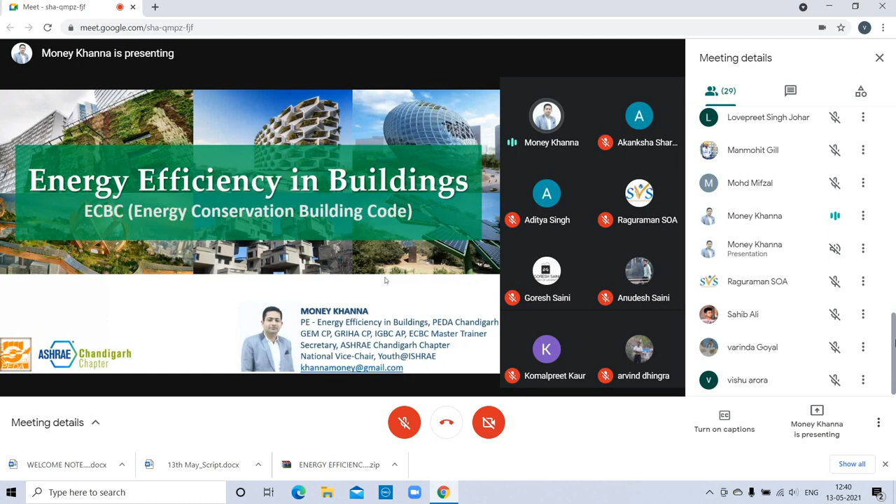So let's start with energy efficiency in buildings, which talks about ECBC, the Energy Conservation Building Code. In a single line, it can be defined as a code specifically for buildings, and the target is to conserve energy in buildings.

This is all about what we are discussing in the next one hour. We all know the situation we are going through, very difficult times where millions of cases have been seen in India, and many cases are increasing day by day in northern India and across India as well. So we need to maintain social distancing, sanitize properly, and stay home as much as we can.

We are discussing buildings today. What is an energy efficient building, and why are energy efficient buildings required? This may be a question each and every student must have. Before directly jumping into the topic, I'll start with some facts we all need to be aware of.

There are some facts about the impacts of global warming. We all know how the seasons are shifting, the weather is shifting, climate change is happening, and global warming is occurring due to the emission of carbon dioxide, CO2 emissions, into the environment.

Another is the melting glaciers. I'm sure you have seen the recent news from Uttarakhand where we have seen the melting glacier, how it has affected human life badly.

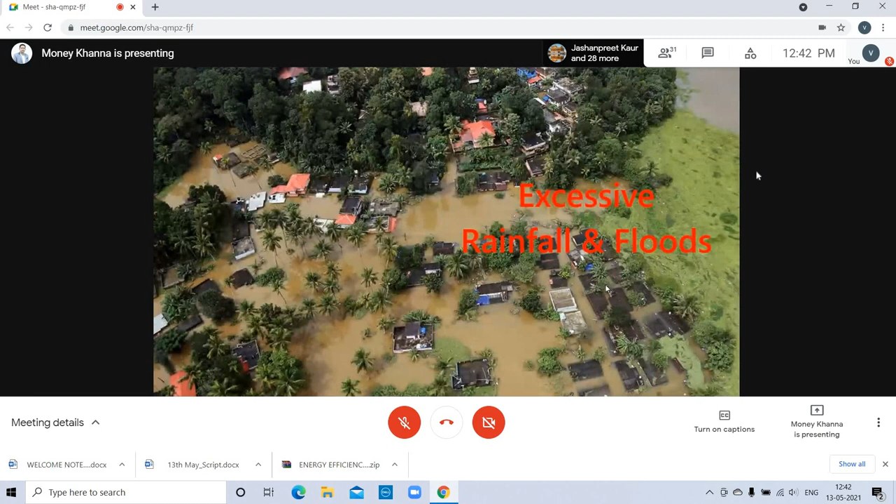These are the environmental consequences: unprecedented snowfall, excessive rainfall and floods. Two years back, there was major excessive rainfall and floods in Kerala and Srinagar. Last year in 2020, it was in Mumbai, Bihar, Madhya Pradesh. So there are many states which have been affected with excessive rainfall and floods.

Another is intense heat waves. The outside temperature and humidity is increasing day by day. If we consider 5 to 10 years back, it was maximum up to 30 to 35 degrees Celsius. But now these summers, we feel that outside temperature is increasing up to 45, 48, even some days 49 degrees Celsius, with more than 90% humidity.

So which is very huge. And what is required for our thermal comfort? It is around 24, 25 degrees Celsius temperature and around 50 to 60% relative humidity. So this is what we require for our thermal comfort.

If the outside air temperature is degrading day by day, air quality is degrading, outside temperature is increasing, relative humidity is increasing, then what happens is our thermal comfort in the external air temperature will not be satisfied, and we shall not be able to stay comfortable in the external conditions.

So even in the developed areas, or we can say the major developing areas, where there are more such resources, more potential to save and generate resources, we still are suffering with acute water shortage—only 7 hours of municipal water supply.

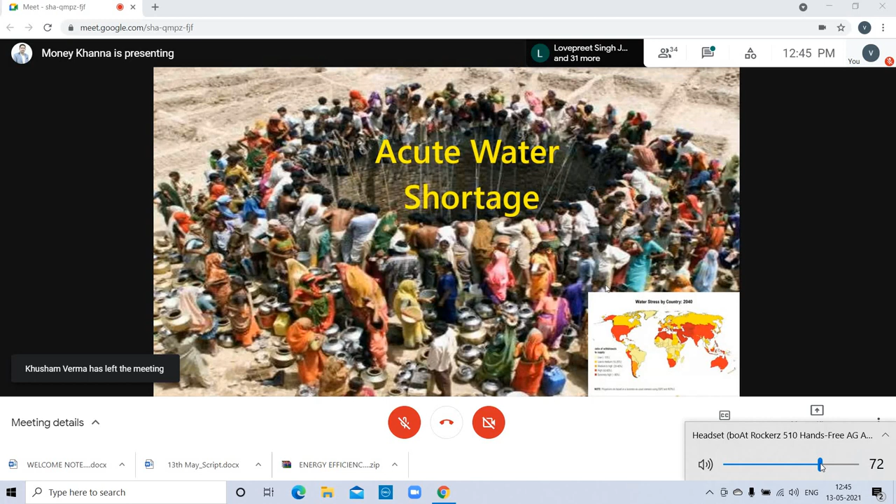Destructive wildfires. What we are doing is destroying our natural jungles and converting them to man-made jungle. Another major issue is the burning of crops.

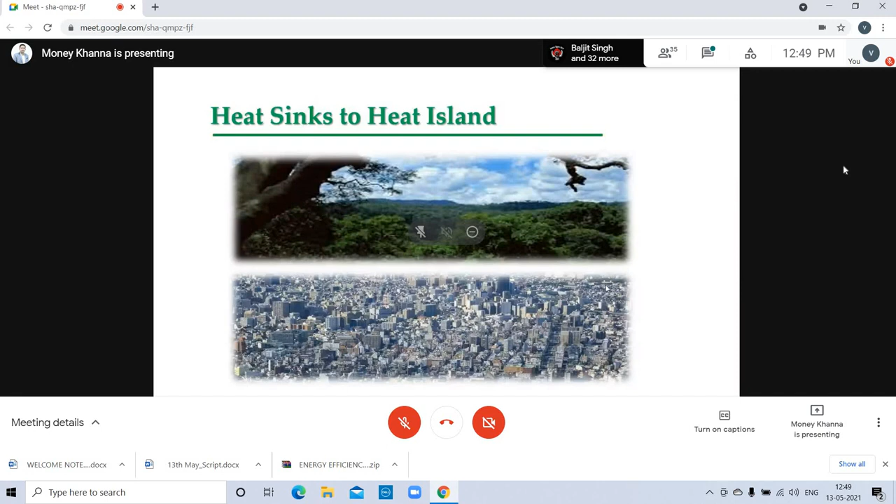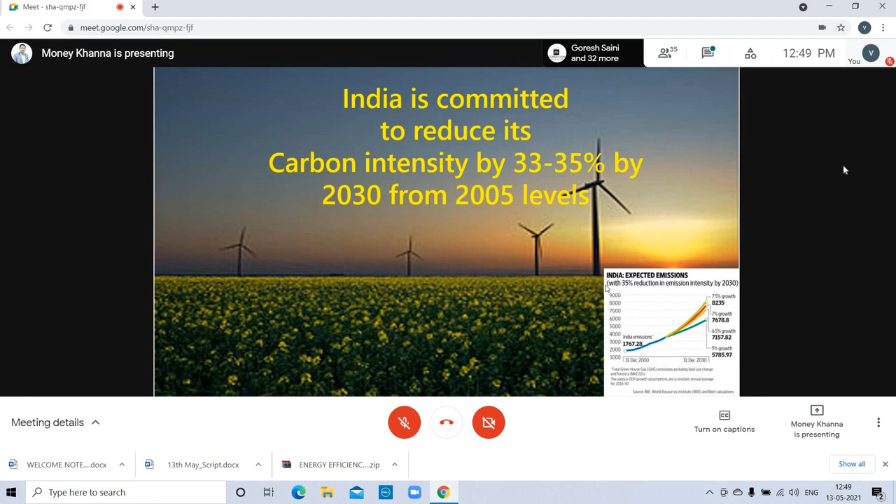So it means we also need to shift towards renewable energy or energy efficiency, which is high time, because we know the buildings are increasing day by day. And under the Paris Agreement and Make in India mission in 2015, we have already signed an agreement where we have committed to reduce our carbon intensity by 35%.

We know the environmental impact of COVID, and we know how the healthcare industry has been affected by coronavirus. But COVID has also given a great opportunity for sustainable development, clearer water and cleaner air. So there is a thought to implement this.

You can see before COVID and after COVID the situation in these pictures. This is of 20th of March and this is of 10th of April 2020, the last year, when the lockdown first happened and complete lockdown started on 22nd of March. There were no buildings, no transport, no industries running. Only a few residential buildings, when people were staying at home. So it means the air quality index was reduced.

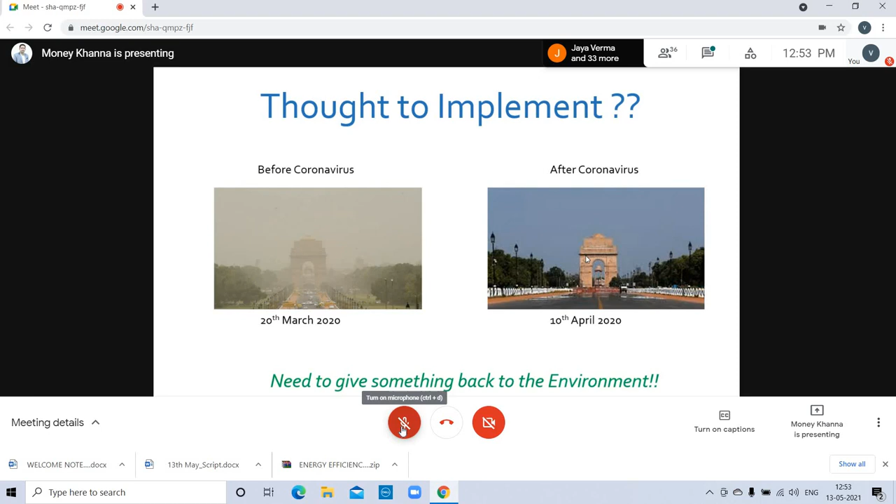The conditions are getting worse because the environmental conditions are already worse there. So we need to give something back to the environment. This is the thought, and at that time, the environment showed a clearer sky, cleaner air, and we were able to breathe fresh, clean air when the air quality index was reduced to 20. The vision is to create a peaceful and sustainable earth which will give us strength for the future.

Now the question is, what is being designed right now, what we are consulting on these days. Being an architect, we need to focus on the design part, how we can integrate the design approach with other engineers like MEP consultants, ECBC, or green consultants involved with electrical, firefighting, and all. We need to create an integrated approach.

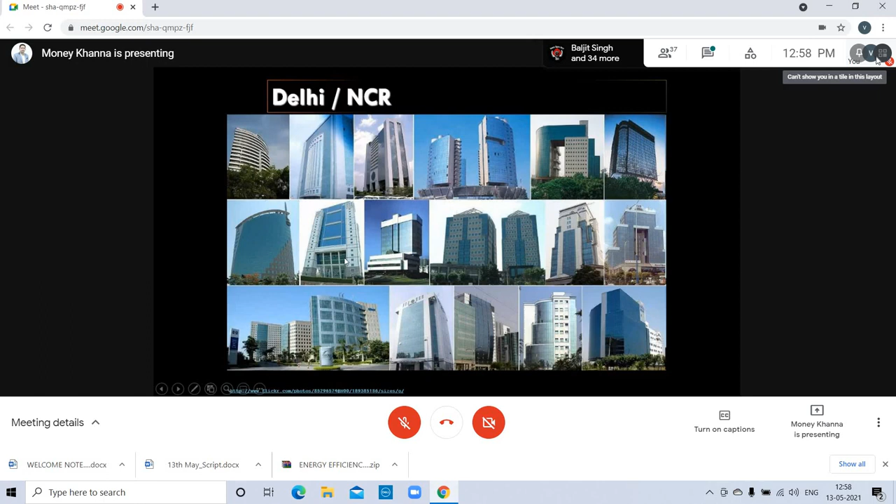The Western architecture that we are copy pasting over here in the composite climate, or even in the Delhi NCR condition, where large commercial buildings are complete glass buildings. Mumbai, a different climatic condition, again tall glass buildings are being constructed everywhere. Kolkata, different climatic condition, again all tall commercial glass buildings we are designing and constructing. So we need to think over it, and you can see the buildings are increasing day by day.

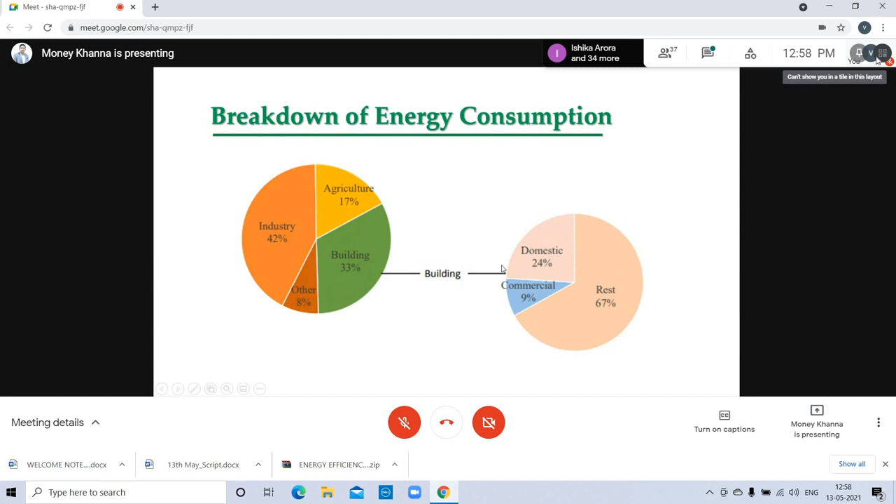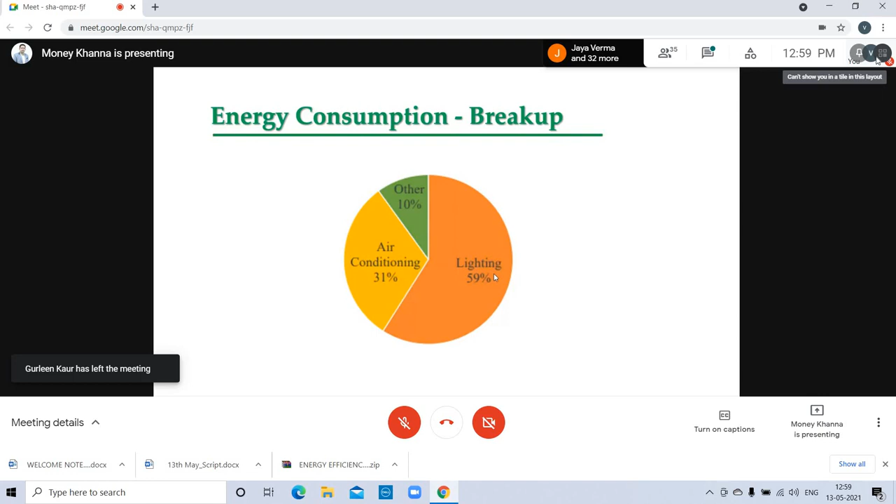Overall, total 33% energy is being consumed in the buildings only. In buildings, more than 90% energy is consumed in air conditioning and lighting, where we need to focus major interest while designing and constructing the building. This is accountability. Once a building is designed and constructed, it will stay as it is for more than 50 years, 70 years, and from the very first day, it will start consuming energy and producing energy bills.

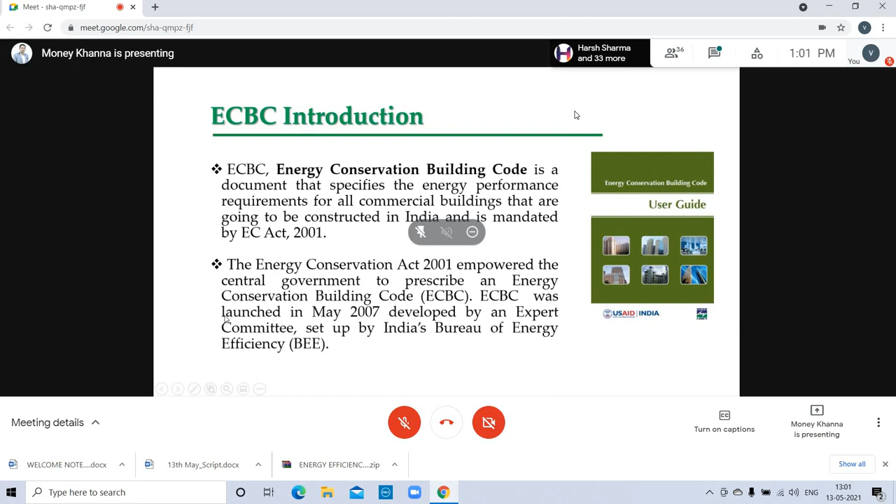As per the EC Act 2001, the ECBC code was developed and launched in May 2007. And each and every government has taken initiative to amend this code as per their climatic conditions, temperature, requirements, and scope.

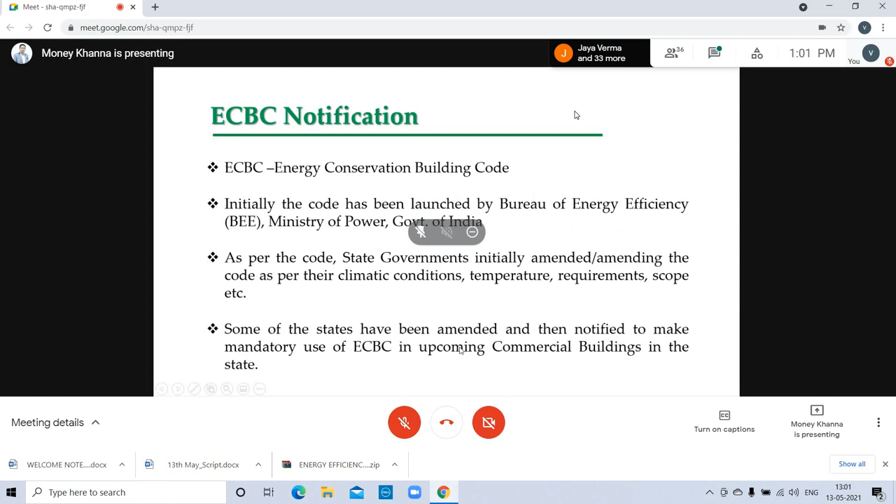So many of the states have already amended this code and notified mandatory use of ECBC in commercial buildings. The objective, I think, was already defined by Aditya for the ECBC. The objective is to provide minimum requirements for energy efficient design and construction of the building. At the level where we are designing and constructing the buildings, we need to raise the bar and we need to set a benchmark, which would be defined as ECBC.

It is not much critical. It is very simple. The buildings were constructed earlier, and now again they will be constructed the same way. The building will be used for the same purpose. Earlier it was for hospitals, again it will be for hospitals. Earlier it was for hotels, again it will be for hotels. The building functioning and the building requirements will be the same for energy efficient design and construction of the buildings.

We need to set a benchmark at the level where we are designing, like the complete glass facades, or the red bricks, or the conventional air conditioner or conventional building systems and appliances, and the glass which we are using, the single clear glass. These are the conventional resources. Instead of the conventional, we can use double glass, which is heat resistive glass. We can use fly ash bricks, AAC blocks, hollow blocks in place of red bricks.

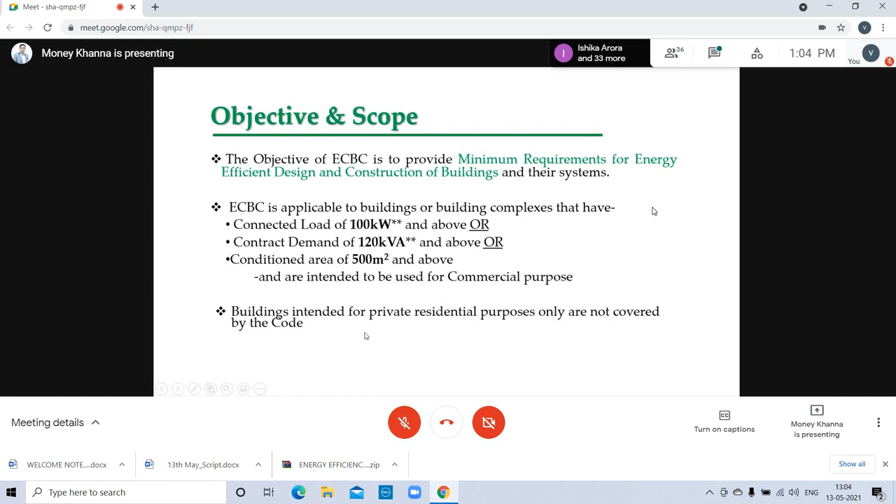To reduce the heat gain, we can put in insulation. So these are the major requirements. We can use 5-star air conditioners and 5-star labeled appliances in the building. So there are many such resources where we can implement energy efficient design and construction. It is applicable for connected load more than 100 kilowatt, contract demand 120 kVA, and conditioned area 500 square meters and above. ECBC is majorly for commercial buildings. Private residential buildings are not covered by the code.

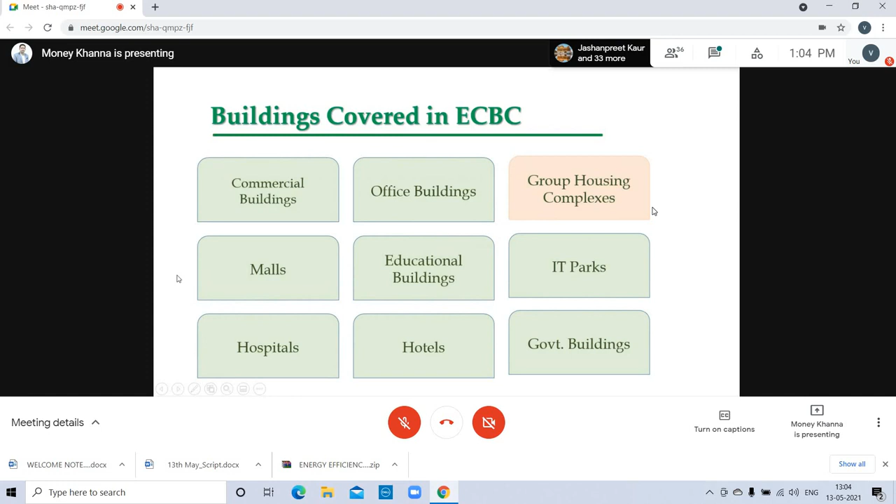Many buildings are covered, like commercial buildings, malls, hotels, hospitals, educational, office, IT parks. These are all covered under commercial buildings and they are a part of ECBC. This is the status of ECBC notification in India. You can see now around 60% of the states in India have already released a notification for mandatory use of ECBC in commercial buildings having connected load more than 100 kilowatt and contract demand more than 120 kVA. More than 60% of India's map is already notified, where Punjab, Haryana, Delhi are already under the mandatory notification.

Some of the states like Madhya Pradesh and nearby states have already prepared the notification and it is under cabinet approval. So it means these are also covered by ECBC. It means around 80% of India's map is covered with the mandatory notification. And when you design any building of more than 500 square meters conditioned area, or commercial buildings in Punjab, Haryana, you need to get certification of ECBC compliance from the ECBC professionals.

When you design a building, when you prepare building plans, and when you go to the authority for approval of your building plans, you need to get your building plans certified by the ECBC design professionals. So you can see here the states, more than 15 states in India where ECBC is now mandatory: Punjab, Haryana, Karnataka, Rajasthan, Kerala, West Bengal, Uttarakhand.

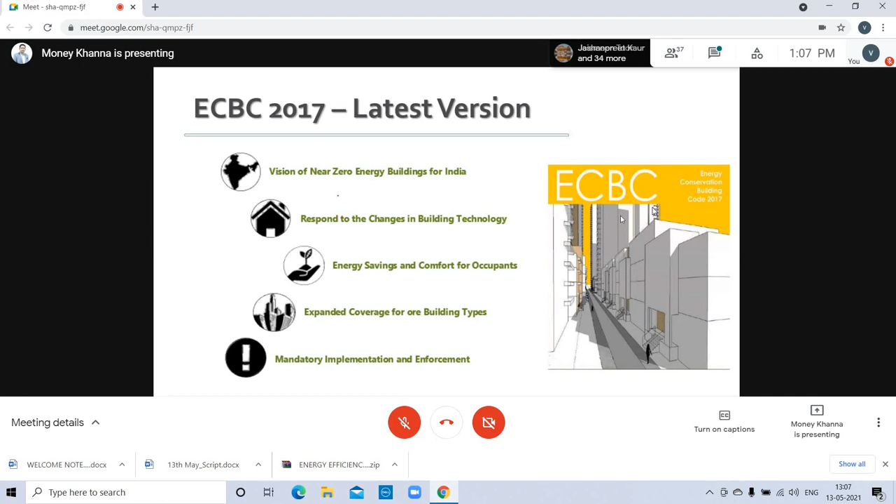It is the latest code and it provides the requirements to be met while designing and constructing your buildings to maintain energy efficiency, to provide comfort, and to maintain the vision of near zero energy buildings in India. It is technology neutral. It calls for the integration of renewable energy. It defines representative building typologies, different buildings, different scenarios, and different requirements to be met.

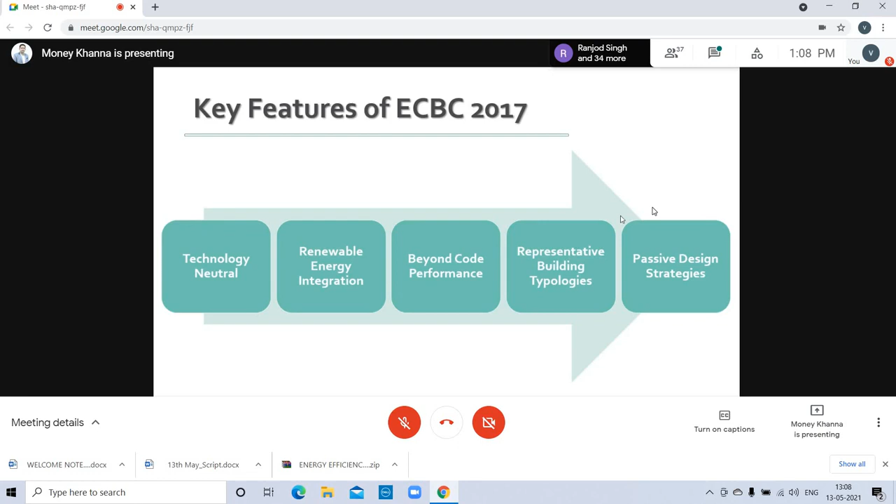Passive design strategies: you need to make a better design which uses natural resources, where we can capture natural light to reduce artificial lighting, natural air to provide proper ventilation and cross ventilation, and the natural sun, where we provide renewable energy sources to generate energy in the building itself, and integration of those technologies which are energy efficient in nature.

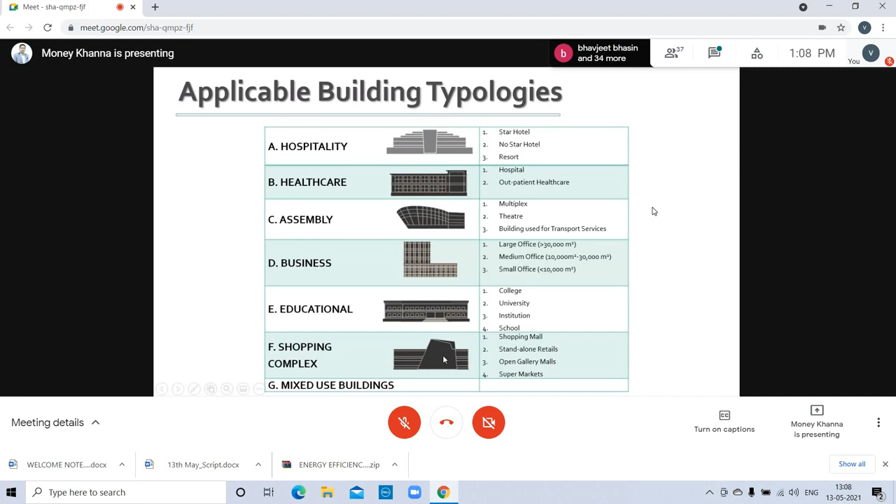This is all about ECBC 2017. You can see the building typologies: hospitality, healthcare, assembly, business, educational. These are the various types of buildings which are covered and being a part of ECBC 2017.

I must encourage and emphasize that we need to design and construct climate responsive buildings, irrespective of whether it is at Jaipur, Mumbai, Chandigarh or Amritsar. If the same building is copy pasted in each and every place with different climatic conditions, your purpose of maintaining energy efficiency will not be solved.

So, Punjab, Haryana, Delhi are covered under composite climate. Jammu, Kashmir, Himachal are covered under cold climate. Rajasthan and Madhya Pradesh are covered under hot and dry. Bangalore and Hyderabad are covered under temperate. And warm and humid covers Mumbai, Gujarat, and Kerala, some of the coastal areas.

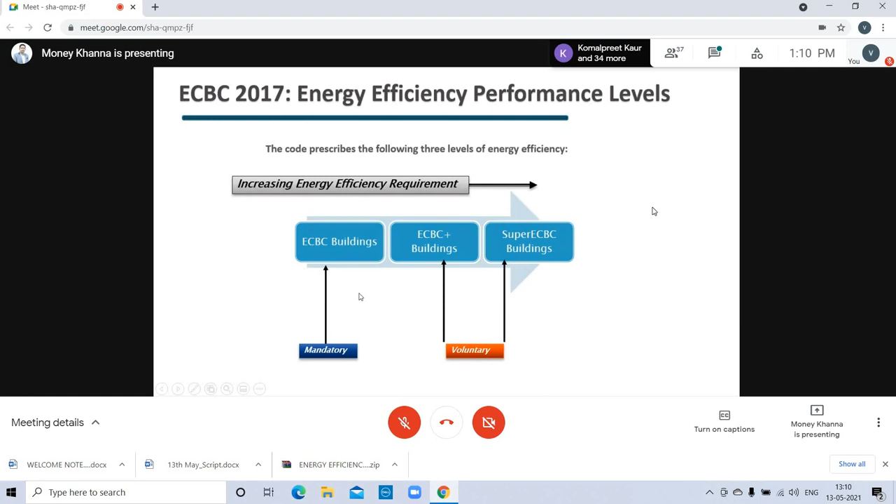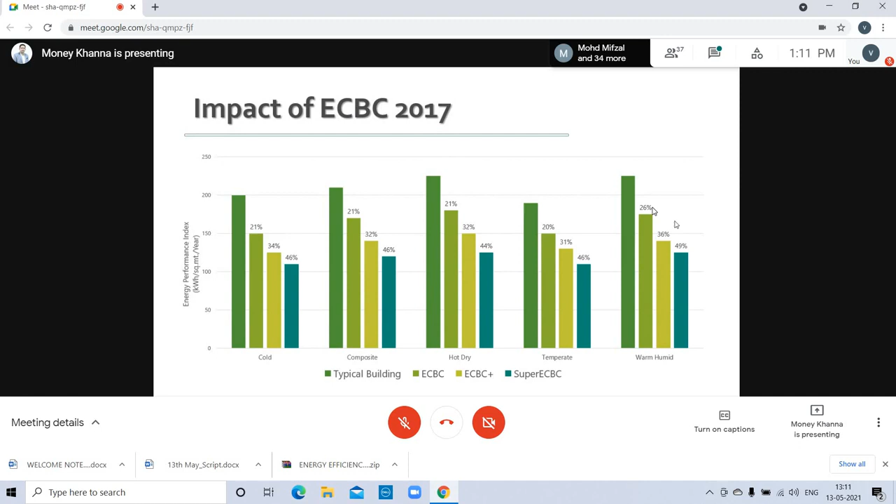ECBC 2017 has 3 levels you need to maintain and achieve: ECBC buildings, ECBC Plus and Super ECBC. ECBC Plus and Super ECBC are voluntary in nature and the ECBC level is mandatory. ECBC buildings can save 20 to 25% energy. ECBC Plus can save 30 to 35%. And Super ECBC buildings can save 45 to 50% energy while designing and constructing ECBC compliant buildings.

So what we need to achieve, what result do we need to carry out? What is the last outcome? The last outcome is the EPI. EPI is the Energy Performance Index. The Energy Performance Index is the annual energy consumption in kWh, in units, divided by total built up area in square meters, excluding parking.

Annual energy consumption over total built up area in square meters will be the EPI, and the EPI of the building should be close to 0. If the EPI is 0, then we can say this building is a net zero energy building. Or if the EPI is close to 0, we can say it is a near zero energy building. So this is our total objective and outcome from the energy efficiency point of view.

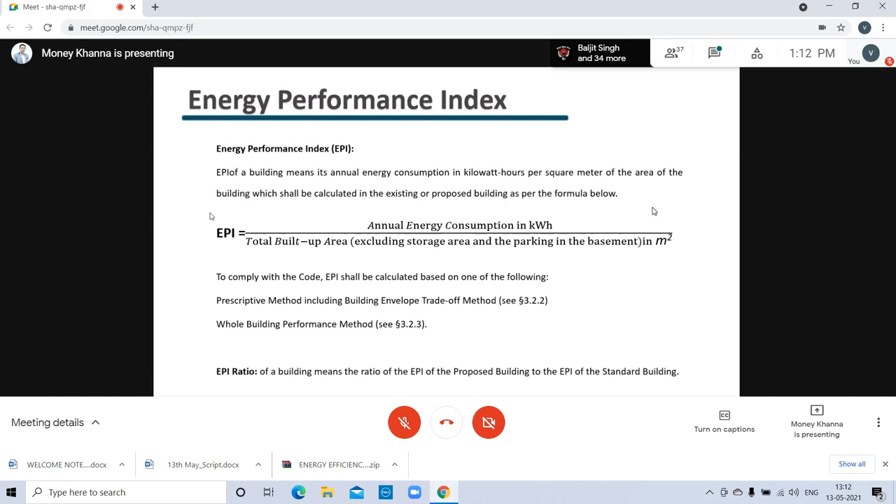Your EPI of the building should be close to 0 or equal to 0. If it is equal to 0, then we can say it is a net zero energy building. If it is near to 0, then we can say this is a near zero energy building. So the question is what you need to do.

There is another parameter which is ECBC-R. ECBC for residential buildings is also coming up. The first part of this code is already notified, but it is voluntary in nature as of now. For large residential buildings, we know we are growing not horizontally these days, we are growing vertically. Previously we were discussing 500 square yard plots, 1000 square yard plots, but today we are discussing 2 BHK, 3 BHK, 4 BHK

residential areas. So that code, which is Eco Niwas Samhita, ECBC-R, is launched by the Bureau of Energy Efficiency. It is being implemented by many of the states, where Punjab is one of the leading states where ECBC-R is being implemented.

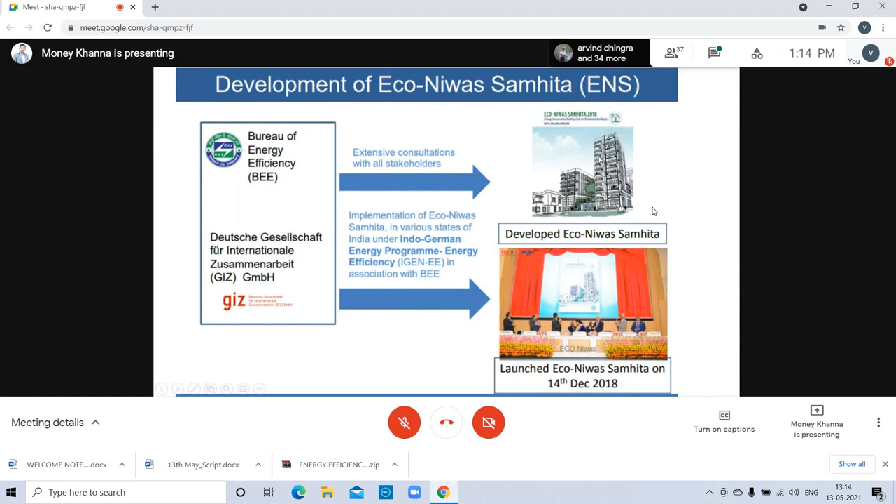Eco-Niwas Samhita was developed by the Bureau of Energy Efficiency in association with GIZ, an energy advisory body from Germany, with the help of extensive stakeholders. Eco-Niwas Samhita was developed in 2016 and was launched on 14th December 2018 by Independent State Minister, Mr.

R.K. Singh. Electricity consumption in the residential sector in India is increasing, because if we design and construct 10 residential buildings, we may get the chance to design one commercial building.

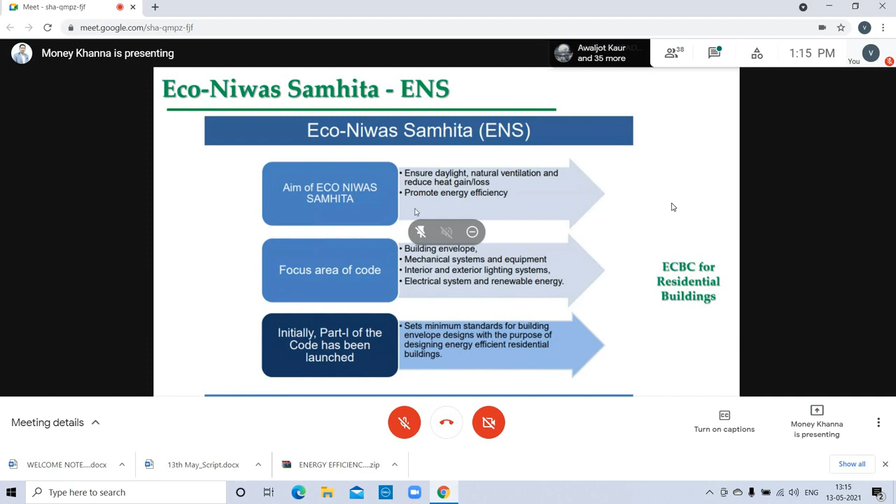So one commercial building is equivalent to around 10 residential buildings. We know around 33% of the energy is consumed in the building sector, and out of that, 75% of the total in buildings is consumed in the residential sector only. So you can think about how energy efficiency plays a major role in commercial and residential buildings to ensure proper natural daylight, natural ventilation, and to reduce solar heat gain in the buildings. To promote energy efficiency, we can develop and design ECBC for residential buildings.

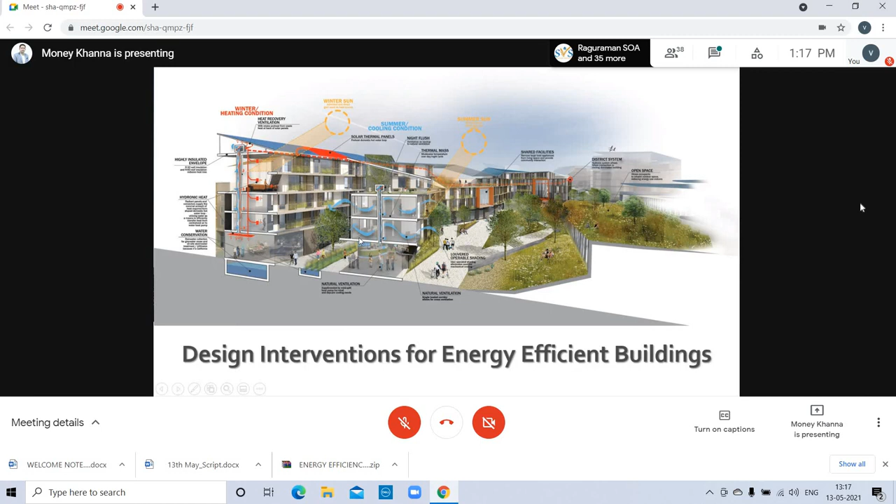Thermal mass, the wall and roof assembly, the sections, the night flush system, the solar thermal panels, solar PV systems, the winter sun, the summer sun, how it is affecting the building, highly insulated envelope, whether roof or wall, and heat recovery ventilation. You can see natural ventilation, how it is being provided, the cross ventilation, the openable windows. Once the air enters, it will cross outside. Again, there is the center space, the green area, and cross ventilation is provided for cross ventilation and natural ventilation.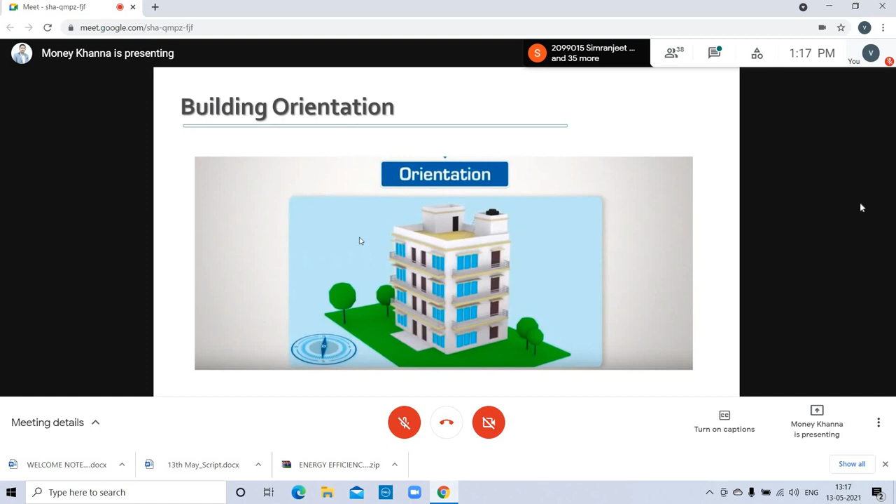Your question: basic parameters to follow, how to start designing energy efficient buildings and green buildings. First, you need to set the orientation. Your building orientation should be such that it does not face the major south or west direction, because in Punjab or Haryana, this is a region with maximum solar penetration in the south and west direction. In the south and west direction, we need to reduce the exposed area. The maximum orientation should be north facing. The maximum facade should face the north-south direction.

The window size and type: we need to provide only 40% window wall ratio. You can see here, whatever window is provided, there is a complete overhang in front of the windows. So window size should not be more than 40% window wall ratio, and it should be single glazed or double glazed glass. The U value: we need to provide proper glass which allows natural daylight to enter inside the building. The wall should be insulated.

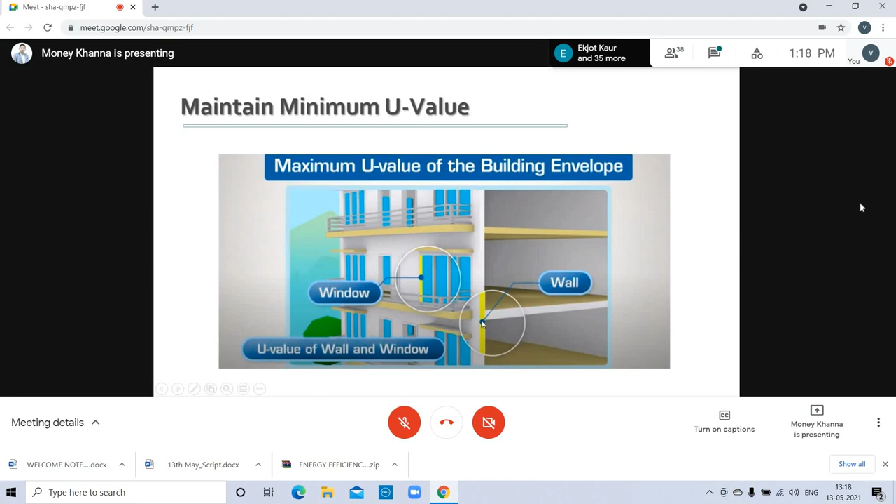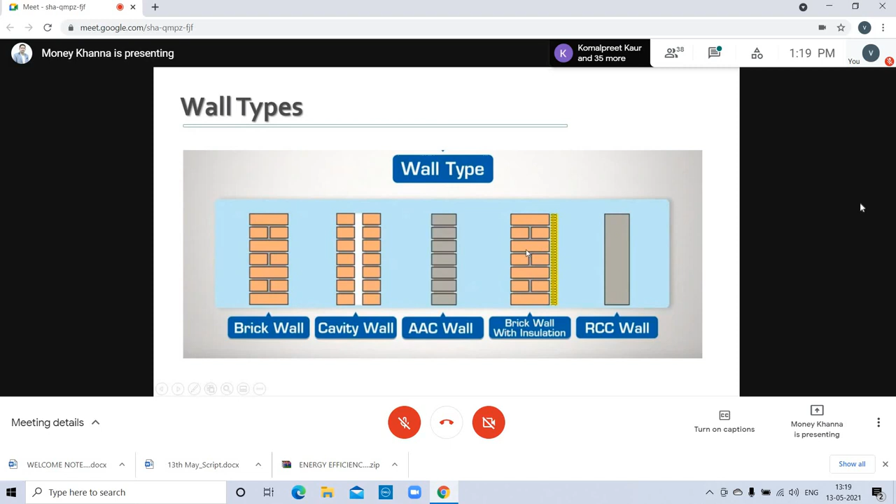The glass should be UPVC frame, double glazed glass, and the wall should be like the brick wall, the cavity wall, the AAC wall, the brick wall with insulation, and the RCC wall. We can use such types of systems, and these systems should be energy efficient, and the whole assembly should be designed so that we can reduce the outside heat gain travelling inside the building. So we can provide cavity wall with insulation, air cavity wall, brick wall with insulation, AAC wall; these are various types.

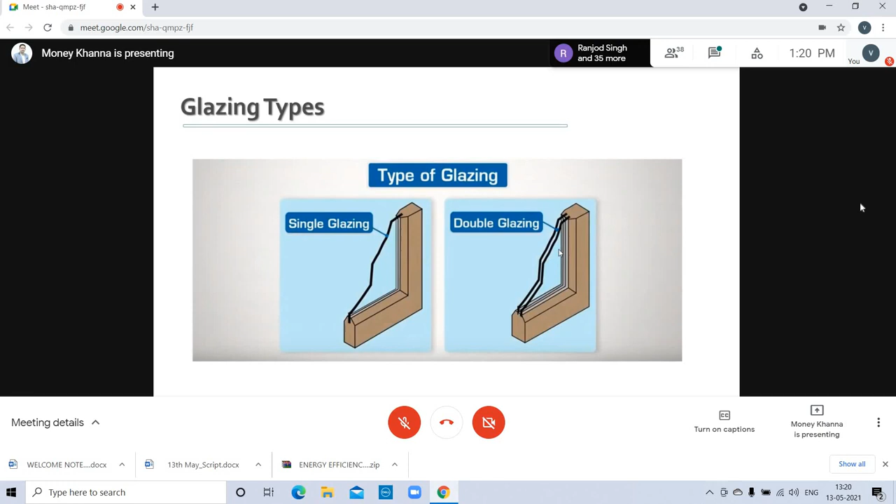And the glass, this is a glass example. This is a UPVC frame with double glass and single glass. Single glass is around 6 mm and double glass would be around 18 mm, where 6 mm is front, 6 mm at back, and 6 mm is the argon gas filled between the two glasses, which acts as an insulator, restricting the maximum heat gain from outside the building.

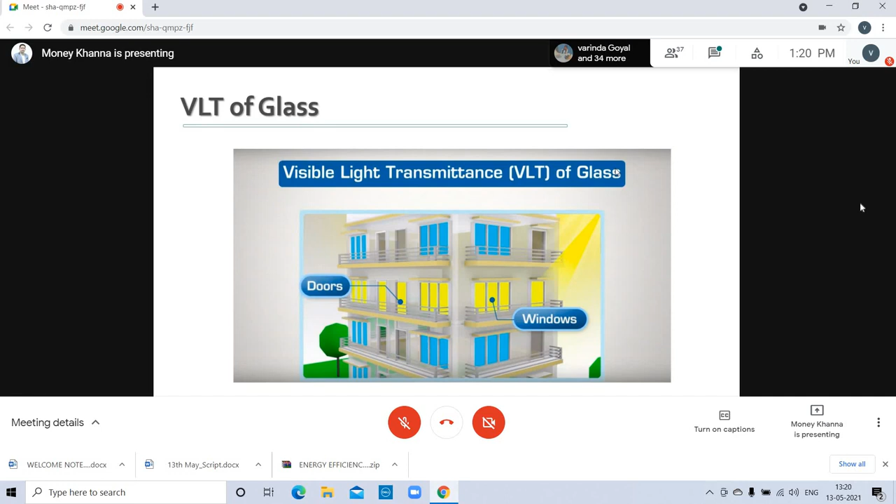The VLT, visible light transmittance: we should use glass which captures the natural daylight from outside. We should not put black glass or dark blue glass. Instead, we can use light blue, light green, clear, tinted or shaded glass, so that with the VLT we can capture maximum natural daylight from outside to inside our building. To improve daylight, whatever glass portion we provide should have overhangs, so that we capture only natural daylight without the solar heat gain.

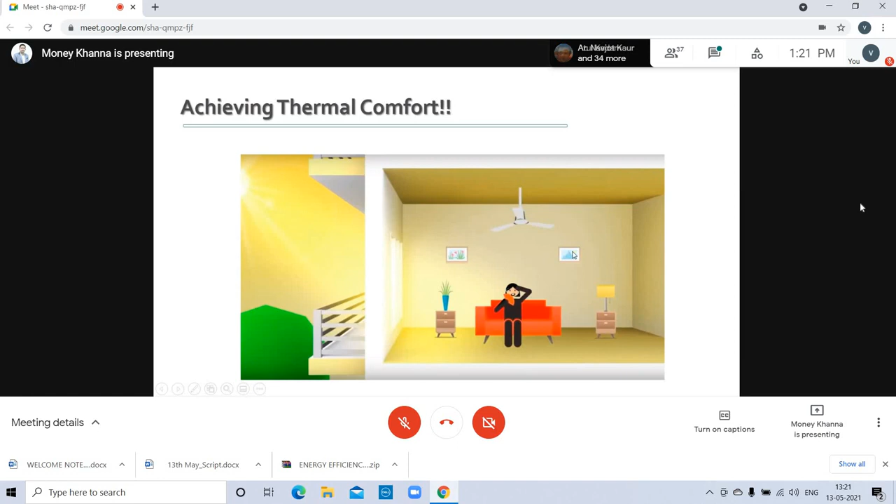Achieving thermal comfort: this is the area inside the room. It provides the cooling, and whatever windows are open will be provided with cross ventilation, and we can achieve the thermal comfort requirements even without any air conditioner. This is the improved natural ventilation. This is the cross ventilation provision. From one side air will enter, and on the other side the air will leave.

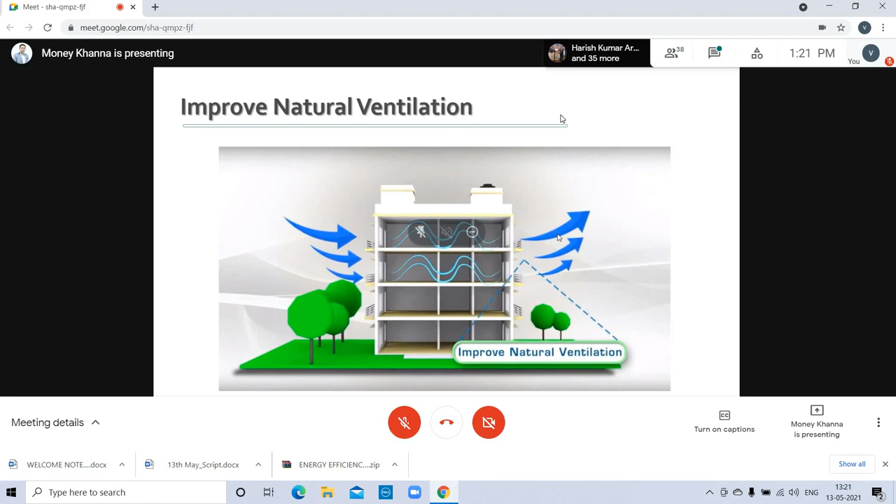So the air changes will happen, the relative humidity will be reduced, and the air temperature will also reduce, because the air changes will happen, and improved natural ventilation can reduce the requirement of air conditioners in the building.

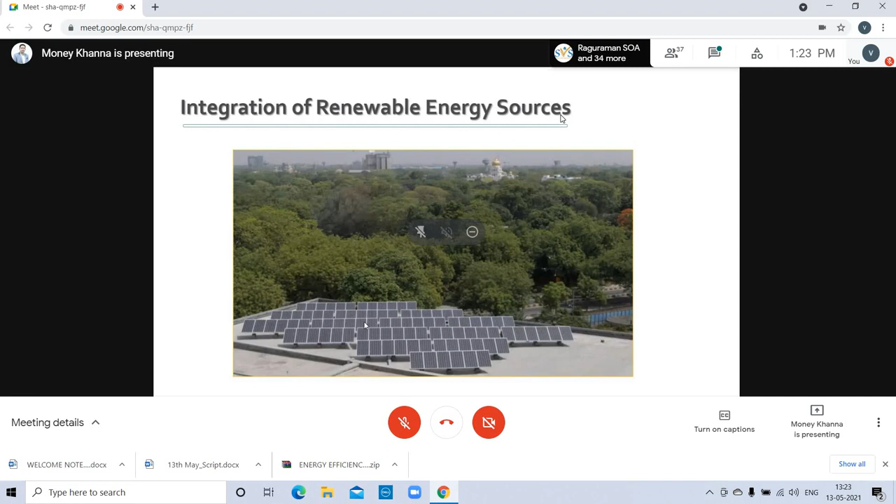Integration of renewable energy system, because this is a very integral part to create near zero environmental conditions, to create net zero buildings. We need to have renewable energy sources in place, so that we can also generate some energy in the building itself. We should not require outside energy from the grids or from any other external resources. We need to provide renewable energy sources in the building itself.

Now the question is, we will design whatever you say. Whatever you say, we will design the orientation. Whatever you say, we will design the window wall ratio. Whatever you say, we will design the vent and improve the natural ventilation. But what are the materials we need to incorporate in the building? This is the last part, and further we'll discuss the case studies.

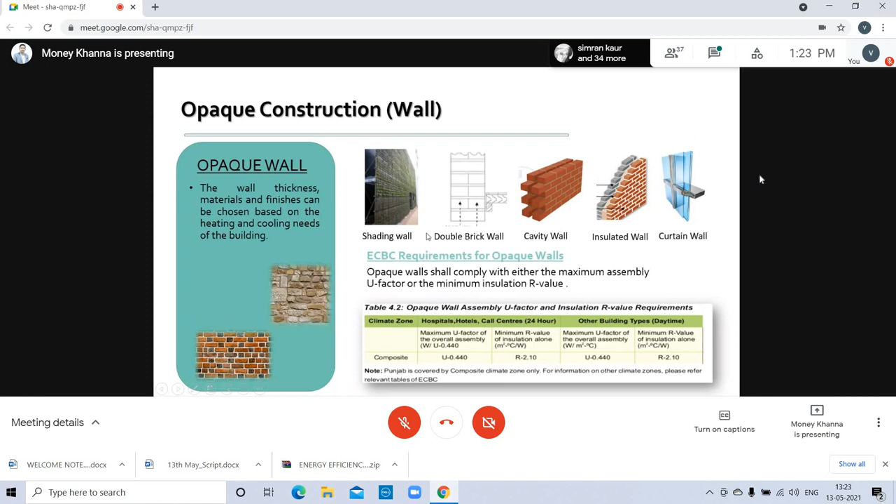Recommended building materials for the walls: the shading wall, the double brick wall, the cavity wall, the insulated wall, and the curtain wall. These are several parameters. Whatever we design, it is like this. Single brick wall, only 9-inch thick brick wall we are using. This is the U value, 1.78. U value means thermal transmittance.

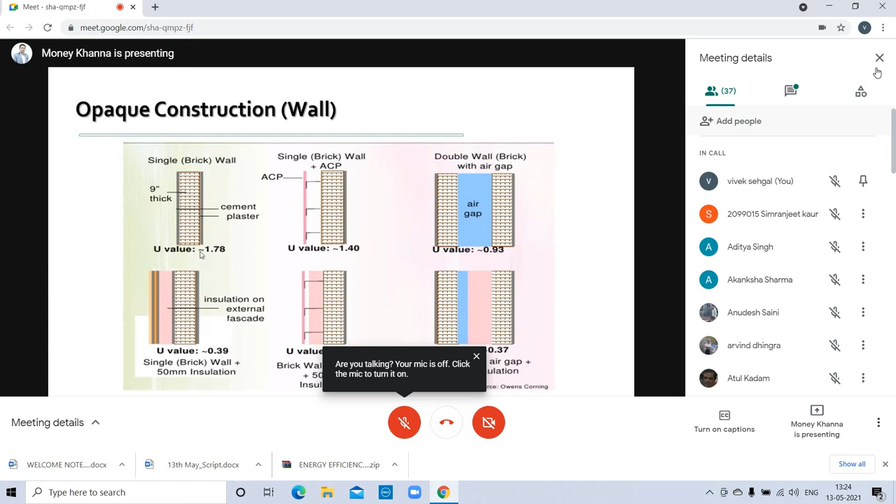At what percentage outside heat will enter inside the building. It means U value is 1.8. It means 1.8 times the outside heat is entering inside the building through processes like conduction, convection, and radiation. These are three modes of heat transfer: conduction, convection, and radiation. Conduction is through walls, convection is through doors and windows, and radiation is through direct sun radiation. It is entering through the glass area.

So we are constructing buildings which are worst in nature. 1.8 times the heat is entering our building. What does the ECBC say? ECBC says your U value should not be more than 0.4. 0.4 U value should be met. So what we have done is, in addition to this brick wall, we have used fly ash bricks, and in addition to fly ash brick, we have used insulation, so that it can restrict the outside heat gain, so that a U value of 0.39 would be achieved.

This is a 3-layer structure. One is the single brick wall, second is the brick wall with ACP, aluminium composite panel, and third is the double brick wall. And these are examples of what we can do to achieve 0.4: replace the red brick wall with fly ash or hollow brick or AAC block. In addition to it, we can place insulation, around 2-inch, 50 mm air insulation. This is how we can achieve the wall assembly.

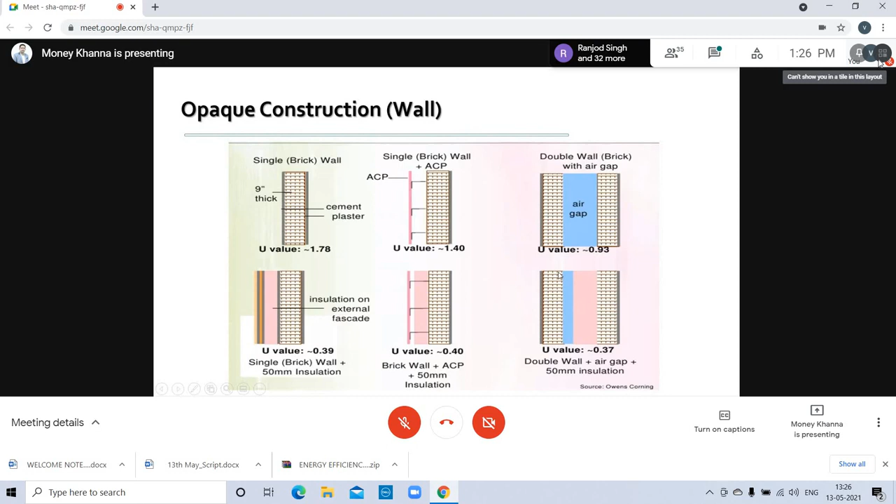Sir, what are AAC blocks? AAC blocks are lightweight autoclaved aerated concrete blocks. Autoclaved aerated concrete block, it is lightweight in nature. It is a composite brick. It is hollow in nature, and you can see one AAC block is equal to 8 red bricks. So the R value, basically the resistivity value, of red brick is 0.8. 0.8 means 80% of the heat from outside to inside can travel.

In AAC block, it is around 0.32. 0.32 means only 32% of the solar heat gain can travel inside the building. The rest we will restrict, so we can save more than 40% solar heat gain inside the building with the help of these AAC blocks.

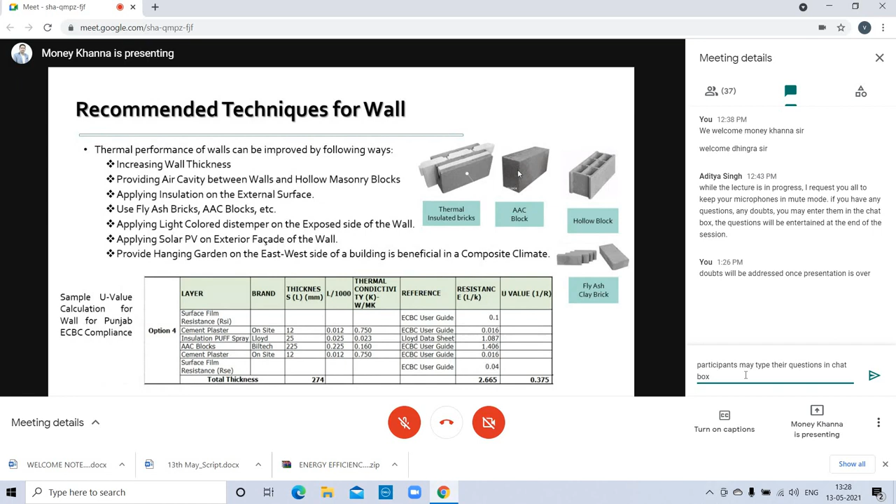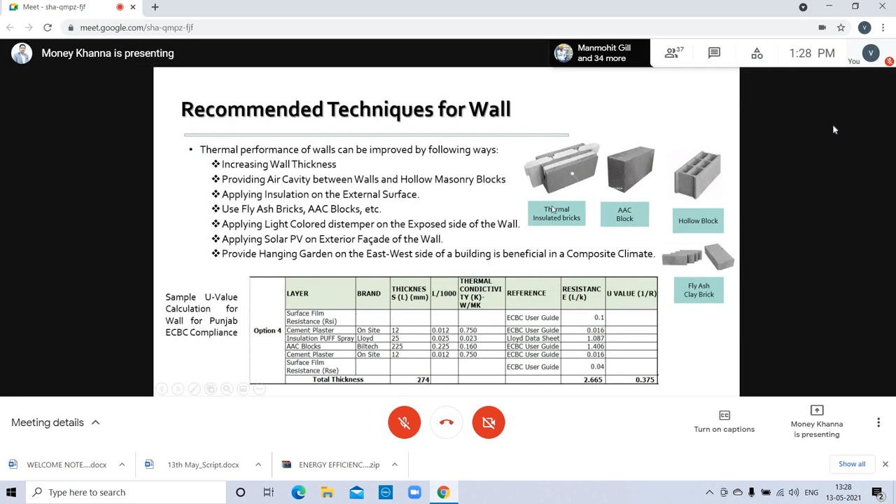Similar in nature, hollow blocks are there, where the air cavity plays a major role inside the block. The fly ash brick has a resistivity R value of 0.6, and hollow blocks have an R value of 0.45. So you can move forward from red brick to fly ash brick, and for further improvement you can use hollow blocks. For more improvement, you can use the AAC block, and for even more improvement, use thermal insulated blocks, where insulation is a part of the brick itself. So these are the wall assemblies.

Wall assemblies include the cavity wall, thermocol insulation, glass wool, rock wool, and puff insulation panels. These are the various building materials you can use.

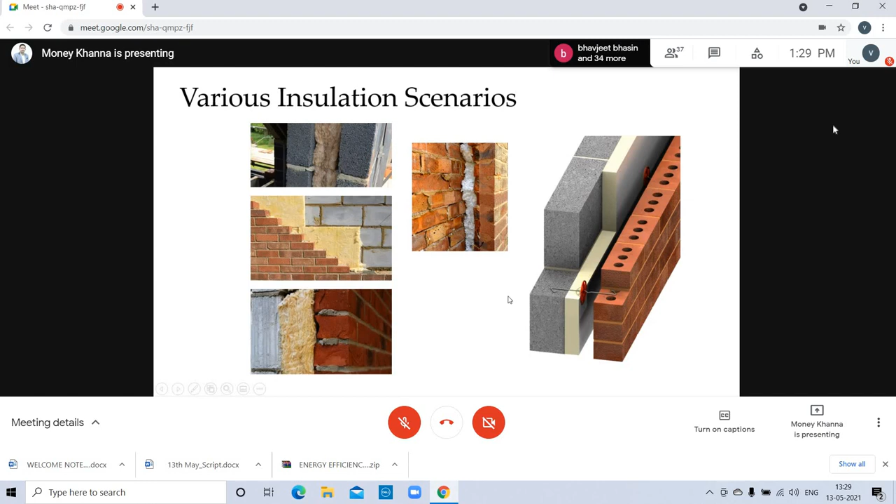So whatever the assembly, whatever the cavity wall with insulation, whatever the thickness of that material, the less solar heat gain there is. Whatever the thickness and material, less resistance means maximum solar heat gain will enter inside the building. So we need to choose the best possible assemblies to go for. We know we need to go for cavity wall with insulation or AAC blocks with insulation.

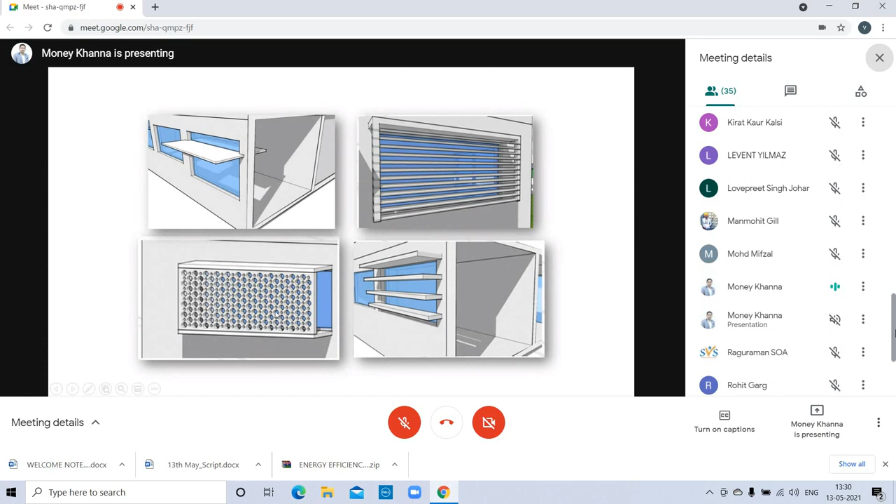These are some of the shading portions, like horizontal shading, jali based structures, and stepped shading, which can allow natural light to enter inside the building while reducing solar heat gain trapped inside. These are the major benefits of putting overhangs, jali based structures, and stepped horizontal shading. These are the areas which we can use to protect against solar heat gain.

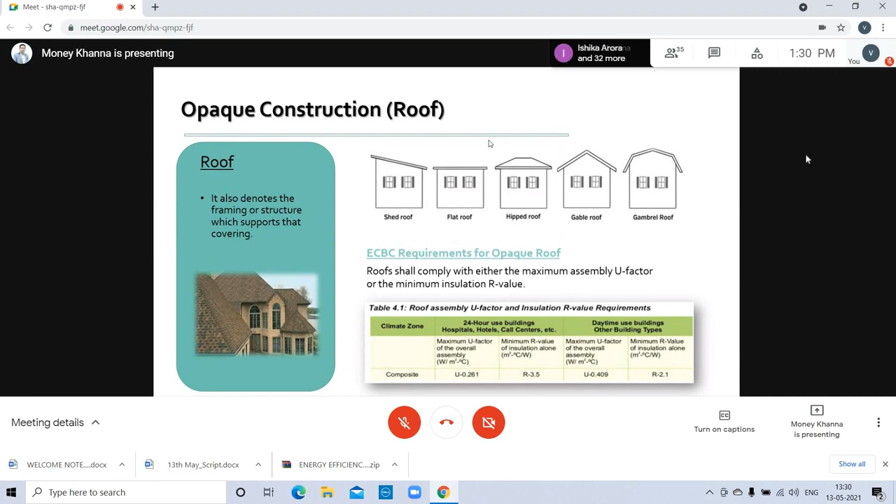For the roof part, we can use the flat roof. More than 80 to 90% of applications use flat roofs in composite areas and composite buildings. We are using brickbat coba in conventional practices over the RCC structure. In addition, we can use insulation over the deck and below the deck. Over-deck insulation is above the RCC level, and under-deck is below the RCC level inside the false ceiling. Over the exposed roof, you can use white tile or white paint.

In addition, you can use the green roof, which is majorly used in terrace gardens, hotel buildings, or restaurants. There are many applications we can also use in residential buildings for organic farming, which can produce food and reduce the solar heat gain entering the buildings.

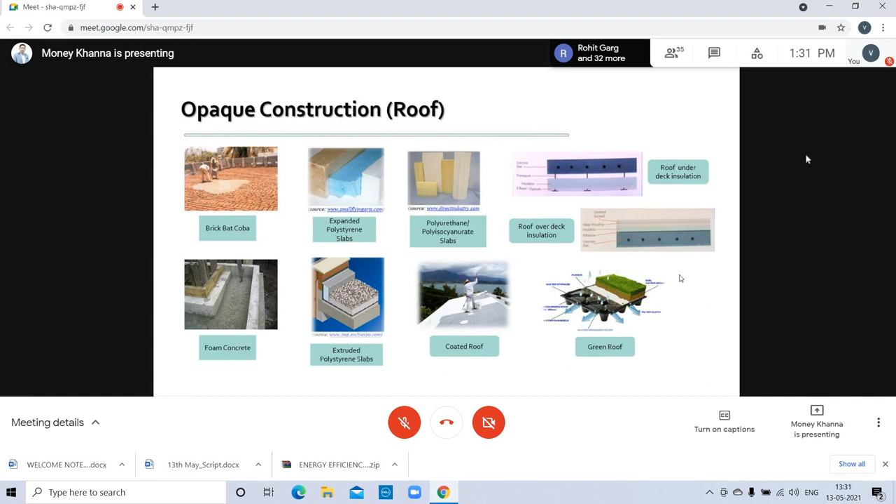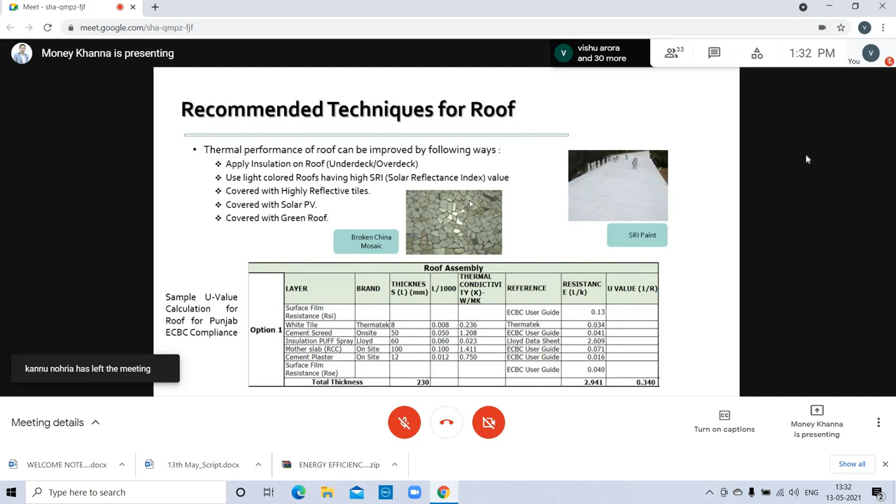Another option is white tile and white paint - it looks like this. In addition, we can also use broken china mosaic tiles. SRI tile, which stands for solar reflectance index, is highly resistant in nature and can reflect more than 95% of solar radiation. Broken china mosaic tiles can reflect more than 40% of solar radiation back to the atmosphere. So these are the cool roof coating technologies.

This is a paint, white paint. It will be applied over white tiles or the surface we have used, the red tiles or red brick tiles used for the exposed roof structure, and over the top of it we can apply white tile or white paint which can reflect more than 95% of solar radiation. The SRI value should not be less than 0.96.

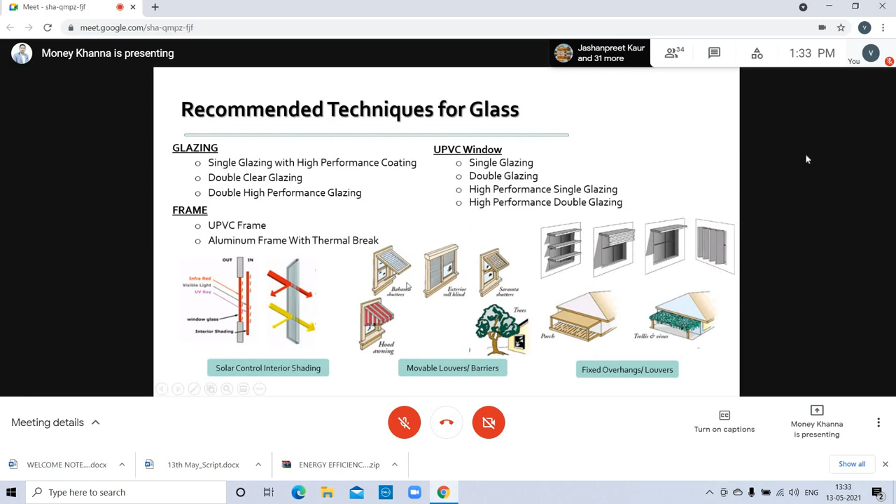Again, the glass - single glaze or double glaze glass or high performance glazing - UPVC windows can use high performance single or double glass. We can use aluminium frames or UPVC frames where double glass is a part of it. In addition, we can provide shading, horizontal or vertical in nature, and use movable louvers or barriers whenever required.

This is another building - we also had a question from people in many other sessions: why are we putting so much glass? Because we need to make the building work that way, so that is why we are using the glass irrespective of the shading.

You can see this building with the help of an artistic look, providing proper shading devices with overhangs and recessed windows. We have used an artistic look that can serve the purpose of reducing solar heat gain, and a building designed like this can help achieve ECBC compliance.

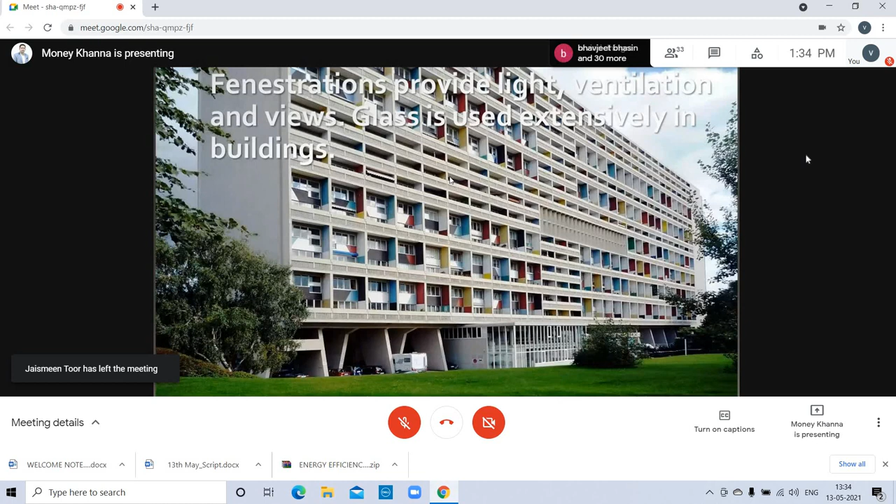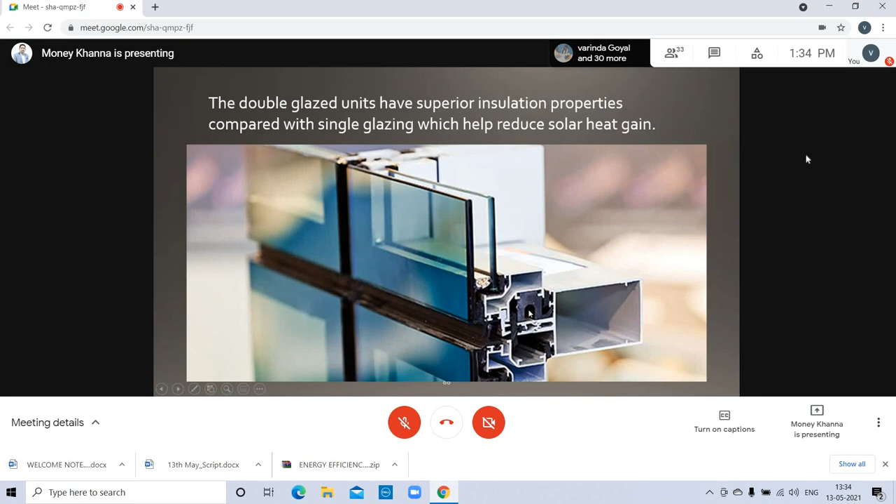In addition to external shading, we can design mutual shading through the building design itself. With these parameters, even for the building envelope alone, we can save 18 to 20% energy through AAC walls, proper orientation, brick walls with insulation, high albedo (highly reflective, high SRI white tile or white paint), roof gardens, roof insulation, and low-U glass using proper glazing with UPVC frames and double glass.

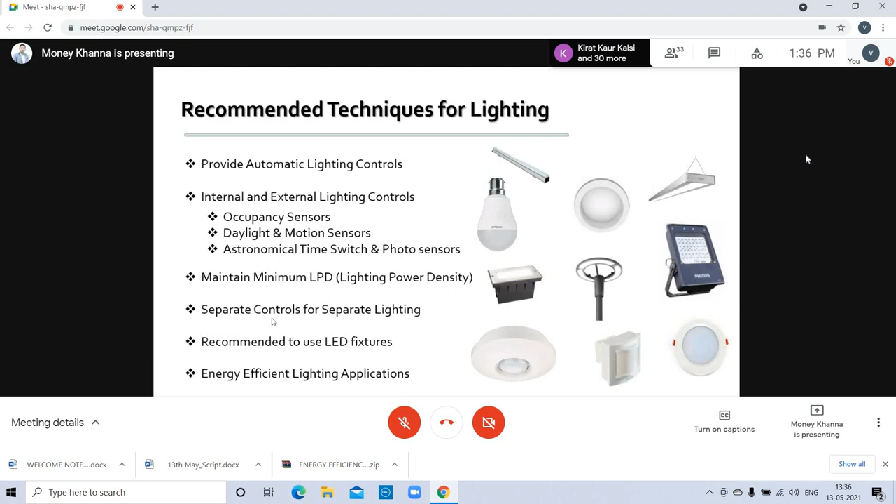For lighting, we can use LED lighting along with sensors such as occupancy, motion, and astronomical sensors. We need to maintain the LPD, lighting power density: for a 100 square foot room, the lighting should not exceed 100 watts, meaning 1 watt per square foot is required to maintain energy efficiency in lighting.

If we use a complete double glass, complete glass building, the outside solar heat gain will directly enter and get trapped inside the building. We can design and construct the building differently instead.

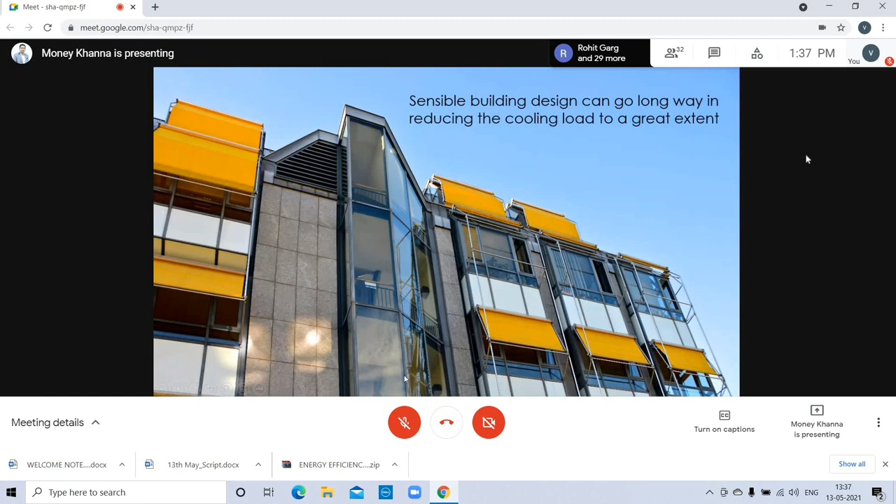Exposed glass should only be used in front of non-occupied areas, like staircases, kitchens, washrooms, and storerooms, which are not regularly occupied.

We should provide shading devices in front of regularly occupied spaces, like the professor's room, director's room, HOD's room, or principal's room in an educational building, along with additional shading in front of that shading. This way, whatever the building design, solar heat gain impact is reduced, less air conditioning is required, and a lower electricity bill is paid. This is a sensible building design that can go a long way in reducing cooling load.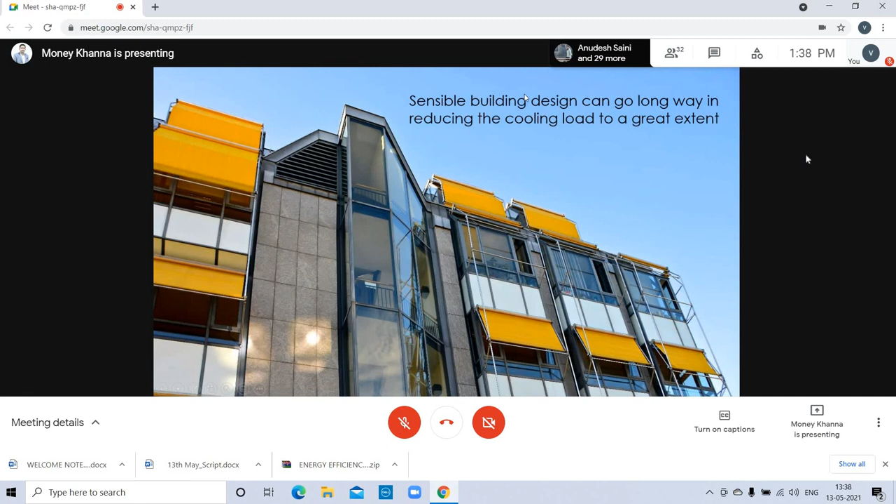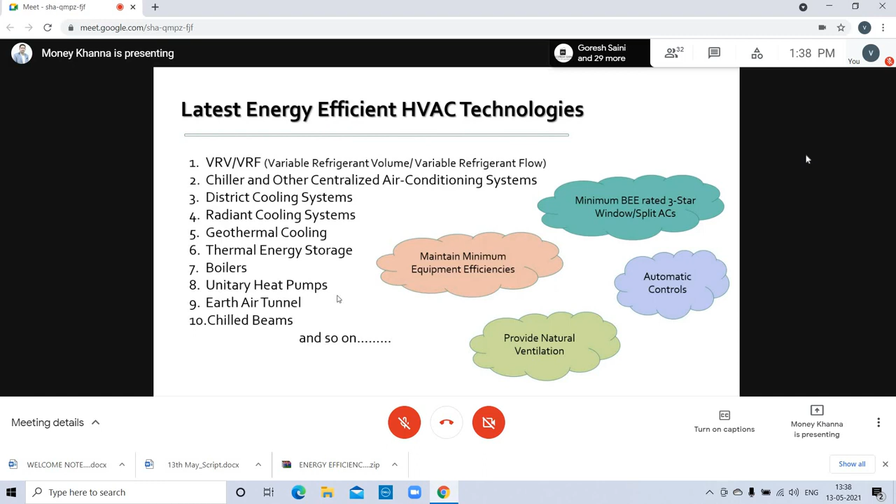There are many HVAC technologies as well: star rated appliances, automatic controls, natural ventilation, and minimum equipment efficiencies like VRV, VRF, chillers, district cooling, radiant cooling, geothermal, boilers, earth air tunnels. Many such efficient systems need to be used for energy efficient buildings.

Now for HVAC, we can use chillers: air cooled chiller, water cooled chiller, centrifugal chiller, used for large commercial buildings like hospitals, malls, and hotels of more than 2 lakh square feet. For such buildings, we need to provide centralized air conditioning systems where we can automate and maintain each and every point.

Whether we use single or double unit air conditioners, or need to set the temperature at 24 degrees Celsius for some rooms and 27 degrees Celsius for others, we can directly automate each and every system from one centralized air conditioning system so that energy efficiency is maintained.

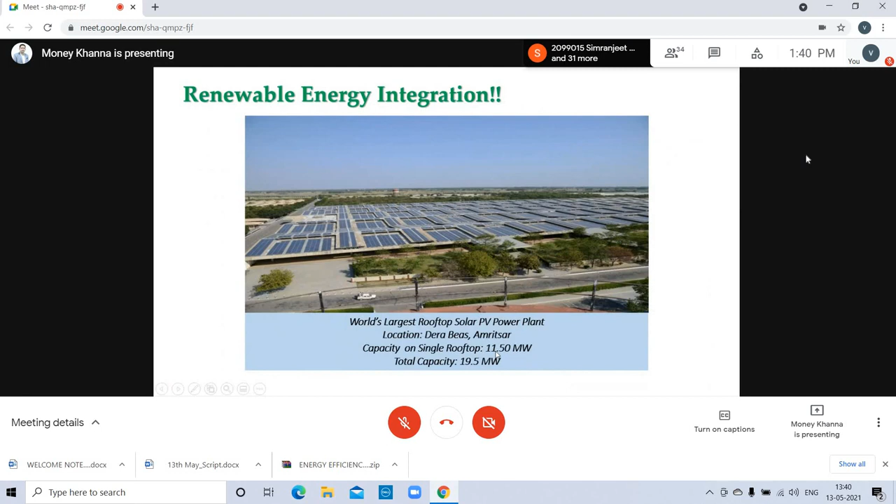This is how renewable energy integration works: the world's largest rooftop plant is at Dera Beas, Amritsar, 11.5 megawatt on a single rooftop. Parliament House has 80 kilowatts, and there's a 2.5 megawatt plant at Sidhwan Canal branch, Ludhiana.

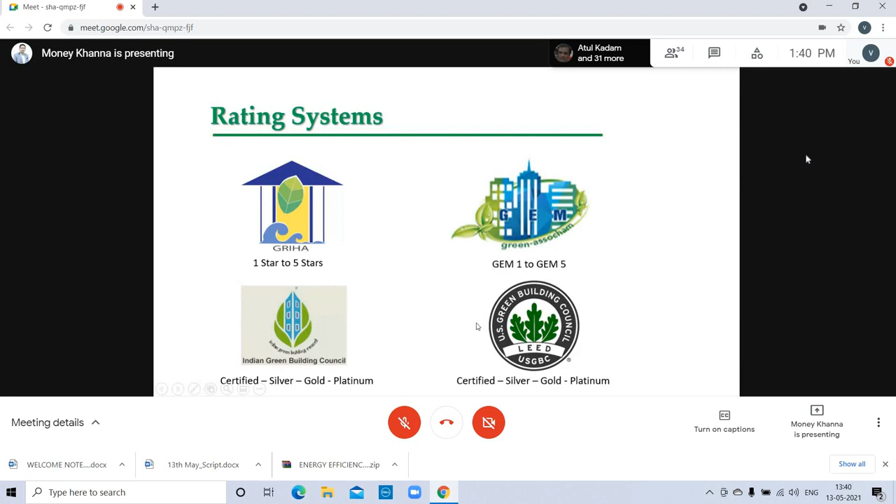For green building rating systems, there are 4 rating systems in India: GRIHA, IGBC, GEM, and LEED. GEM provides GEM 1 to GEM 5 ratings, GRIHA provides 1 star to 5 star ratings, and LEED and IGBC provide certified, silver, gold, and platinum ratings.

These 4 rating levels are used by state governments to provide incentives for construction of green buildings. You can even get 5% extra FAR, floor area ratio, for designing and constructing energy efficient, eco-friendly green buildings that are water efficient, waste efficient, materials efficient, indoor air quality efficient, and innovative in their design and construction.

Some of the case studies I would like to show very fast, as we are running short of time.

BISA is one of the buildings, Borlaug Institute for South Asia, at Ludhiana, designed by Department of Architecture, Punjab. Climate zone composite, 2 floors, 55,000 square feet, connected load 400 kilowatt, ECBC compliant building. You can see double glass everywhere, cavity wall with insulation, roof with insulation, every shading device provided, central air conditioning VRV system provided, LED lighting with automation sensors, and central courtyard provided in BISA.

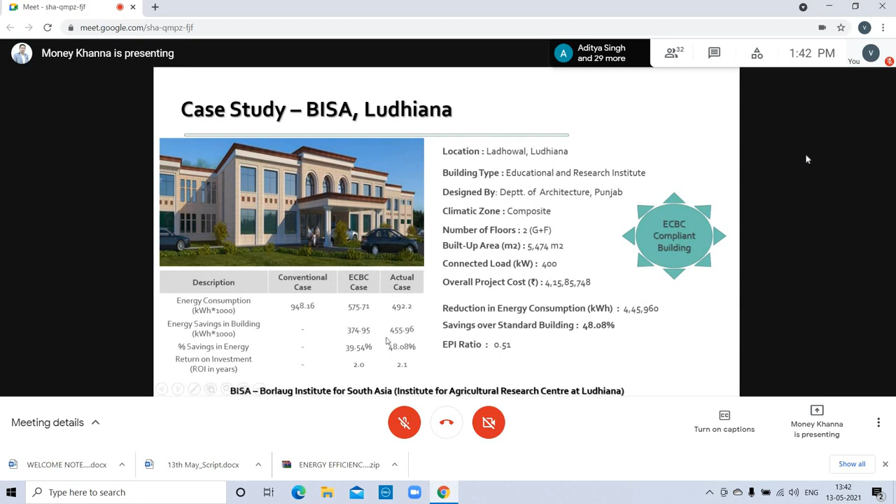It is a hand-holding project with us. We have provided facilitation and technical assistance to this project, and we have saved more than 48% energy efficiency. The EPI ratio is 0.51, which is a remarkable achievement for energy efficiency in buildings.

Another is Jang-e-Azadi Kartarpur. I'm sure you are all aware about it. When we travel from Jalandhar to Amritsar, on the right side, this is a government project worth 300 crore, with complete auditoriums with centralized air conditioning, complete courtyard with natural ventilation, outside assembly with cavity wall

with insulation, double glazed glass, and it is completely energy efficient and green in nature. You can see in the wall, cavity wall with fly ash, styrofoam insulation, heat reflective tiles, RCC. We have also given technical assistance to them from PEDA, and being an individual consultant of energy efficient buildings, we have maintained and received more than 60% energy efficiency in this building.

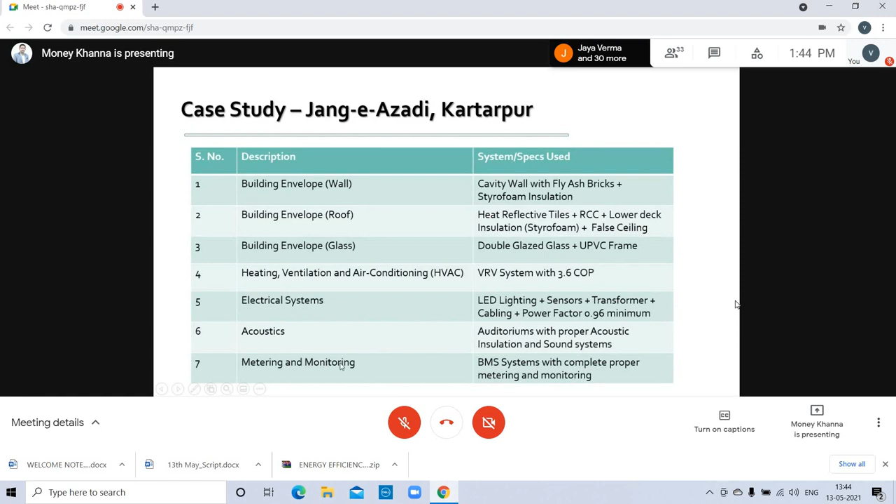Double glazed glass, UPVC frames, VRV system, LED lighting, transformer, power factor 0.96, acoustic auditorium with proper acoustic insulation, metering and monitoring, BMS system with complete metering and monitoring - this is Indira Paryavaran Bhavan.

It is again a near zero energy building, one of the first net zero energy buildings in India. EPI of this building is around 5 to 6. This building is integrated with solar panels, a complete courtyard, natural ventilation, green trees in front, cavity wall with insulation, double glass, roof with insulation, and the complete roof is integrated with solar PV panels.

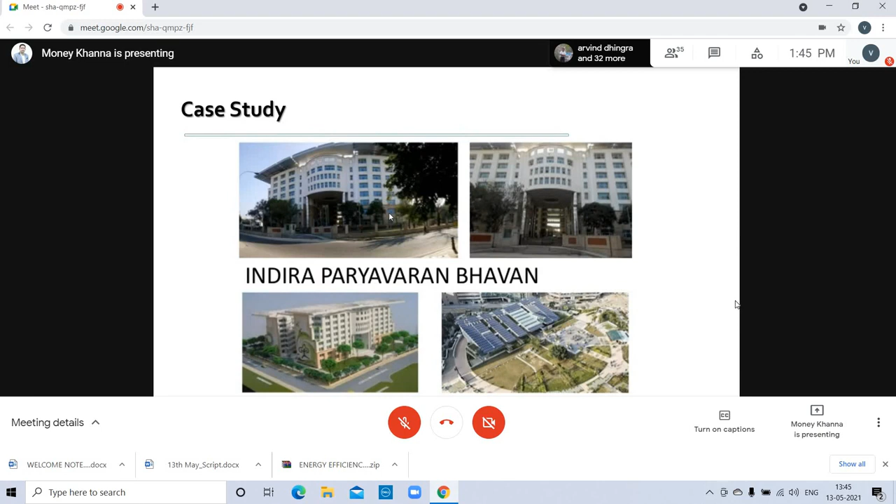This building has been constructed by CPWD and is used by MOEFCC, Ministry of Environment, Forest and Climate Change. The officials of MOEFCC are occupying it, and it was constructed by CPWD.

India Habitat Center is a GRIHA 5-star rated building, complete designed and constructed in such a way that national and international conferences are held regularly.

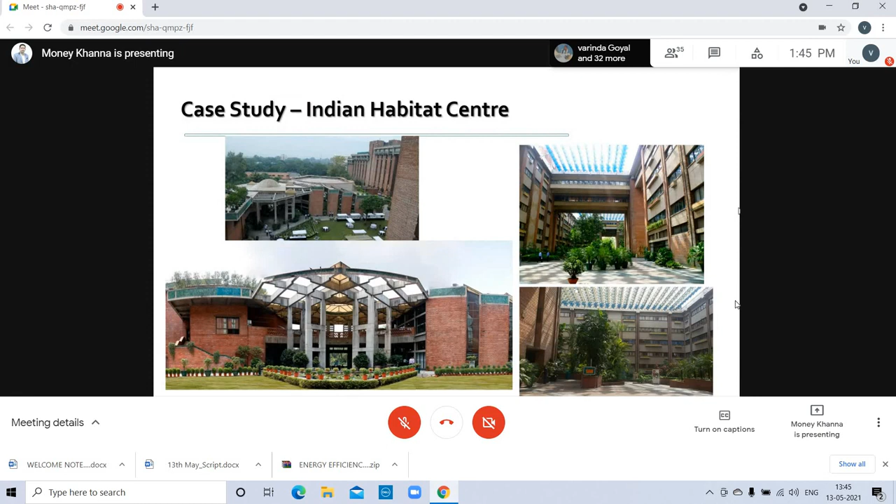Hareda building again has a complete central courtyard with proper natural ventilation, with a complete misting solution as innovation in HVAC. Once misting is used at the ground floor and first floor, there is no requirement of air conditioning. We have sat over there and operated our complete system from inside the Hareda building.

We have provided technical assistance, integration of solar PV panels, integration of roof SRI tiles. You can see the glass placement.

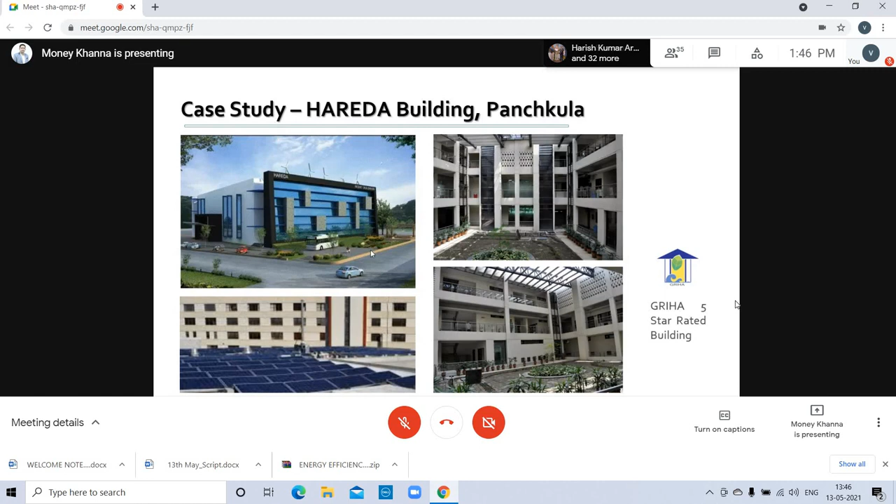It is not at the same level as the building facade, it is external to the building facade. You can see the glass, and the building's south part - the design and construction is such that it is a GRIHA 5-star rated building and one of the near zero energy buildings. EPI of this building, Energy Performance Index, is 13.5.

And the last is the PEDA building, where we are sitting. It is completely using natural resources - natural light, natural sun, and natural air. With the help of natural air, natural cross ventilation is there, along with natural light. You can see with the help of proper shading and glass areas, we are capturing natural light, and with the help of natural sun, there's a complete courtyard integrated with solar panels, and we are generating energy in our building itself.

The EPI of our building is 13.39. It is a 5-star rated building. There is no air conditioner majorly in the complete building, complete seating area. These are the workstations, complete open in nature. There is no requirement of artificial lighting, and no requirement of air conditioning even in this summer season.

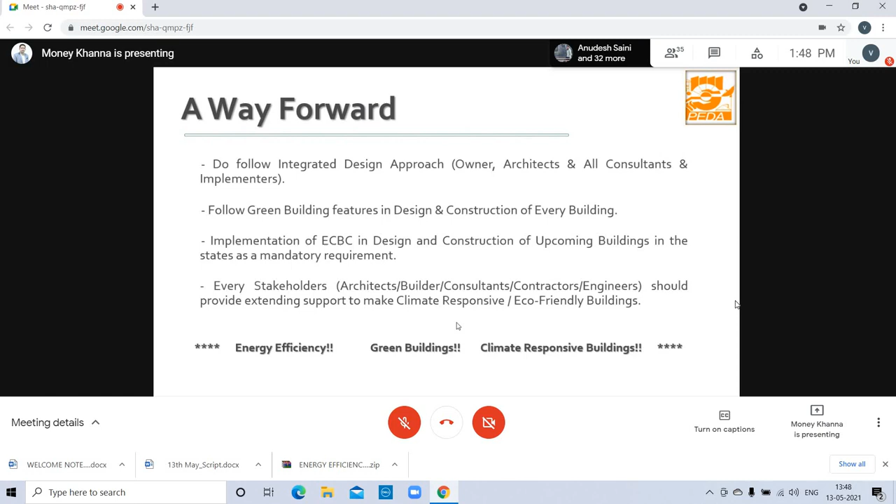So the way forward is to follow an integrated design approach. Owner, architects and all consultants - we all need to sit together. We need to follow the integrated design approach, follow climate responsive buildings, and follow green building features in design and construction of every building. Implementation of ECBC in design and construction of upcoming buildings in the states should be a mandatory requirement for every stakeholder, whether architects, builders, consultants or contractors, to extend support to make climate responsive and eco-friendly buildings.

So these are the benefits which are provided by the government. Punjab is providing 15% rebate in property tax for ECBC compliance, 10% extra FAR for green building, 100% exemption on building scrutiny fee for ECBC and green buildings. Development of state energy policy is in process. In Kerala, state soft loans for construction. Telangana, state prioritized permissions. Rajasthan, financial assistance through SIDBI and ECBC implementation in MSME.

Himachal Pradesh, 10% extra FAR. Gujarat, 50% assistance on consulting charges up to 2.5 lakh rupees. Haryana, up to 15% extra FAR on GRIHA certification. Pune, 10%. Noida, incentive of 5% extra FAR. So there are many such huge financial incentives. Government is already taking initiative.

So I encourage and motivate each and every one of you who are participating, and I must oblige if you can motivate and encourage each and every friend of yours in the architecture side or in the building industry side. There are many incentives. You need to design and construct energy efficient and green buildings so that we can also contribute a bit to the environment, save energy, and construct energy efficient buildings.

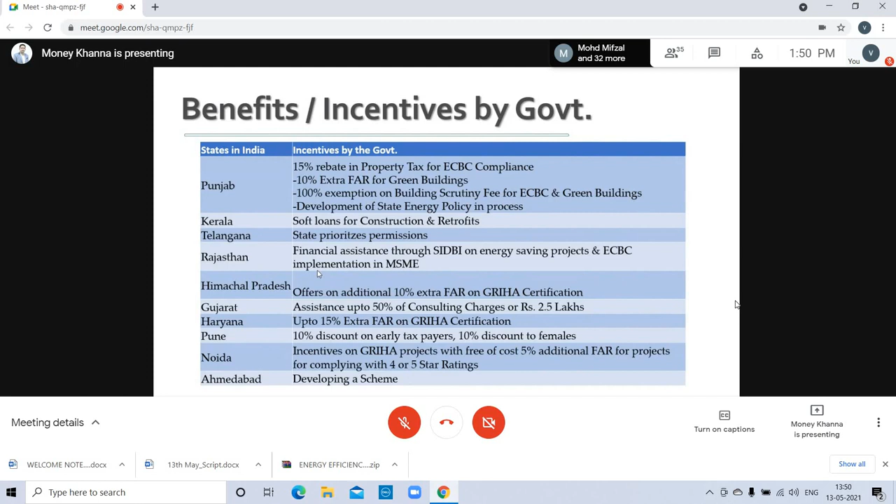We need to go for large or cavity walls with insulation or many such systems that we have discussed so far. We need to integrate proper design, proper integration of green, ventilation and use of natural resources. The objective is to save our planet, to make eco-friendly and environment responsive buildings which are energy efficient and green buildings.

So set AC at 24. Yes, summer season is coming up, but again due to COVID, when there are no major industries, no major commercial buildings running, we are feeling comfortable staying at home, but do not set AC below 24. Set AC at 24 degrees Celsius, take the pledge.

It is a campaign which is run by ASHRAE and by the Ministry of Power. The target is to reduce energy consumption. With a 1 degree raise in temperature, you can save 6% in your electricity bills. So save in temperature, save in electricity bills and maintain energy efficiency.

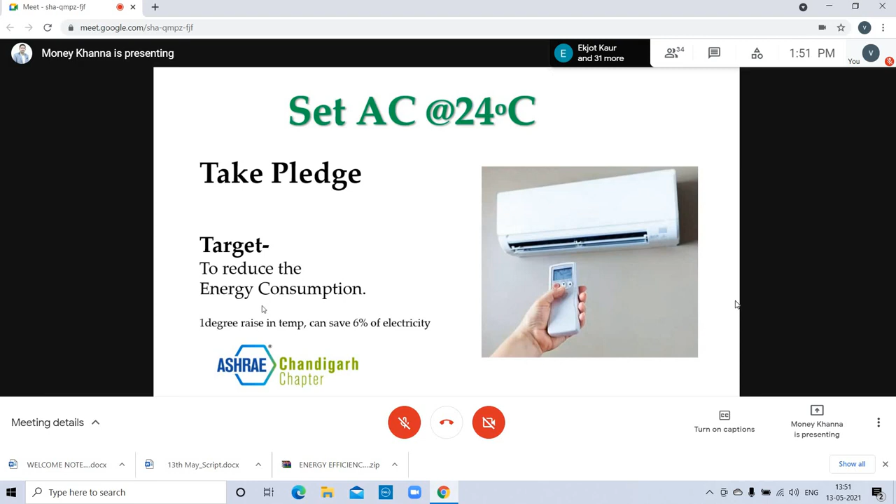So there are 17 sustainable development goals across the globe we are working on, and out of 17, 9 goals are being achieved by green buildings, energy efficient or environment responsive buildings only. So this is a major achievement. If we can improve our thinking, improve our building plans, integrate energy efficient design, and go for certification of green buildings, we can definitely achieve a lot, because we need to be responsible.

The earth doesn't belong to us. We belong to the earth. This is a major quote by Chief Seattle. Save earth, save life, save planet, save water, save energy, and save waste. Because the future ends with us.

Thank you very much for your kind attention. And I'm sure you will definitely take these learnings from this session today and implement them in your future projects. Thank you very much.

So that was undoubtedly a very wonderful lecture, and I'm sure that our audience present here would have learned a lot. Now, the audience can ask questions to clear their doubts.